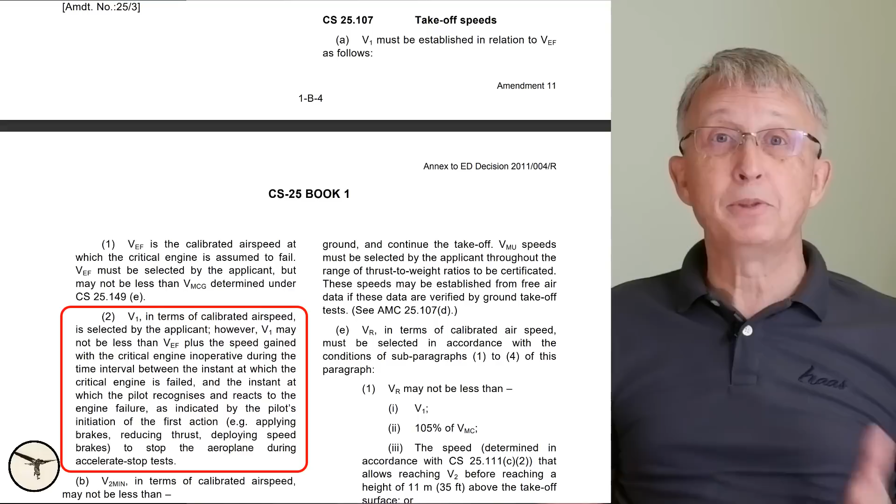This is similar to what you do when you're reaching minima during an instrument approach. If you are not visual before minima, your decision is to go around when you reach minima. I have made a video just about that, and you can see it here. I made a link below.

So when pilot monitoring calls V1 and you have not decided to stop, you are committed to go. If you decide to stop after V1, you may not be able to stop, either because there is not enough runway or because the brake energy limit is exceeded.

It is also very important that pilot monitoring calls V1 at the correct speed. The best practice is to finish the callout when the aircraft is reaching V1.

What are the risks involved in a high-speed abort? I will use data collected in the period from 1959 to 1990. Out of 230 million flights, there were 76,000 rejected takeoffs. 74 of them, or 0.1%, resulted in accidents or incidents.

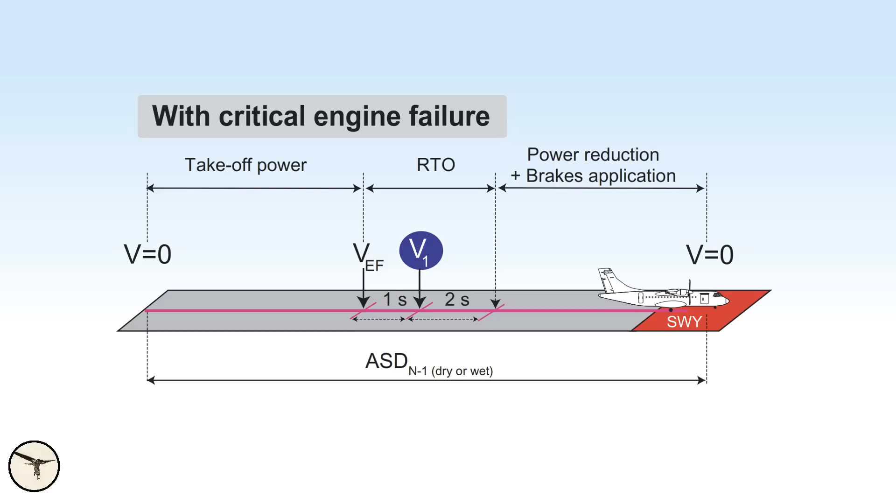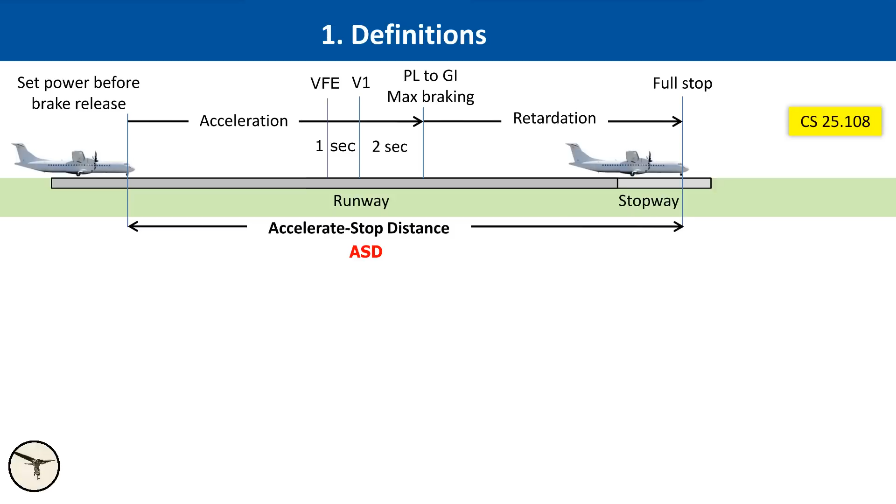The accelerate stop distance is determined as follows. The critical engine is simulated to fail 1 second before V1. At V1, the pilot starts to apply idle thrust and full braking. The brakes are fully worn to simulate a worst-case scenario. Use of reverse is not included in the calculation unless specifically mentioned. As I said earlier, the accelerate stop distance includes a distance equivalent to 2 seconds at V1 speed before deceleration. This gives a little margin.

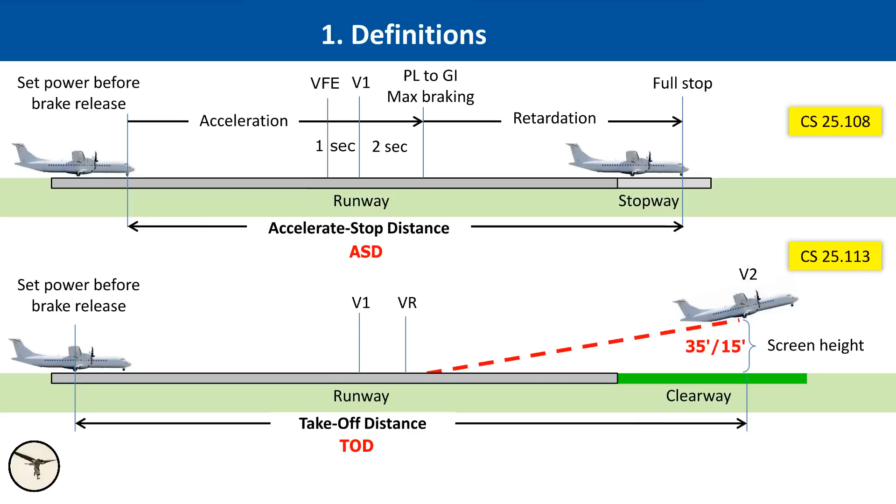The takeoff distance is determined in the following way. The critical engine is simulated to fail at V1. The aircraft continues to accelerate past V1 with reserve takeoff power on the operating engine until reaching VR, rotation speed. When airborne, the aircraft shall pass over the end of the runway with a height of 35 feet, or 15 feet from a wet or contaminated runway, with a speed of V2. After the landing gear is retracted, the aircraft shall climb with a gradient of minimum 2.4% of the travel distance until reaching acceleration altitude.

Then we level off and accelerate to the speed for the best rate of climb, reduce power to MCT, maximum continuous, retract the flaps and continue climbing.

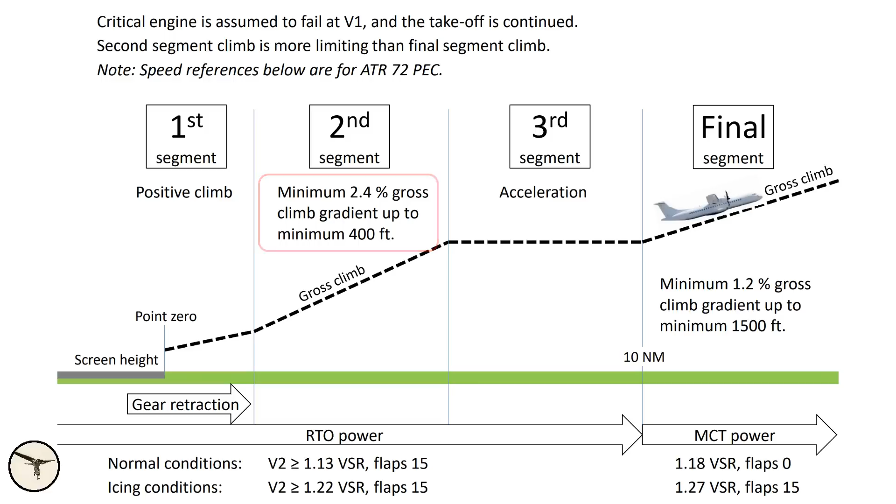Minimum acceleration altitude is 400 feet. Obstacles might require a higher acceleration altitude. The obstacles must be overflown with a height of at least 35 feet, plus a safety gradient of 0.8% of the travel distance.

Before the runway at Cataclan was extended, it had an elevation of 7 feet. The highest obstacle was 138 feet above the airport, or 145 feet above sea level.

We had to cross over the obstacle with a height of 35 feet, so total 180 feet, plus 0.8% of the distance from the runway end to the obstacle.

The distance is 698 meters, or 2,290 feet. 0.8% of 2,290 feet is 18 feet, giving a total of 198 feet. So let's say 200 feet.

When flying commercially, we want to carry as much payload as possible. After all, it is the passengers and the cargo that pay our salaries.

When the runway is long and there are no climb restrictions, we can load up the aircraft and go. Shorter runways require more planning. We do not calculate how much runway we need, but how much payload we can carry from that runway under the current conditions. As I said earlier, minimum V1 is engine failure speed plus 1 second.

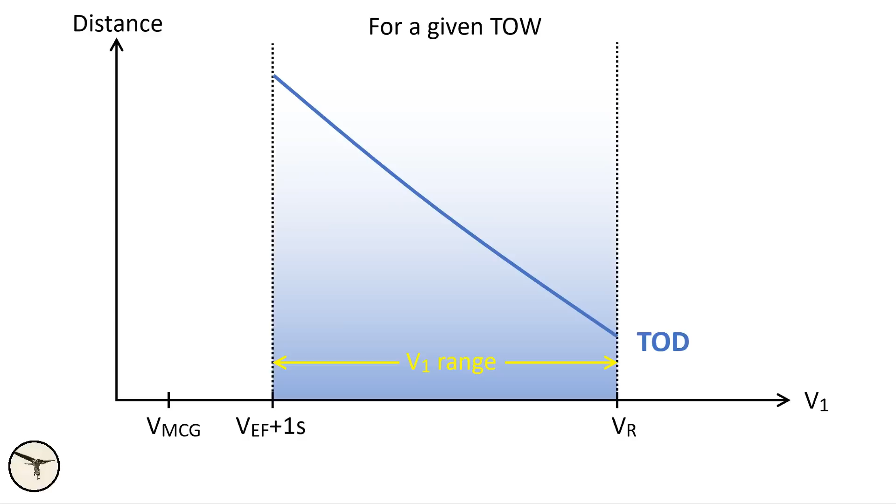The optimum takeoff V1 is one where the accelerate stop distance and the takeoff distance are equal. That gives us what we call a balanced V1. There are more factors to this equation, but I hope you get the point.

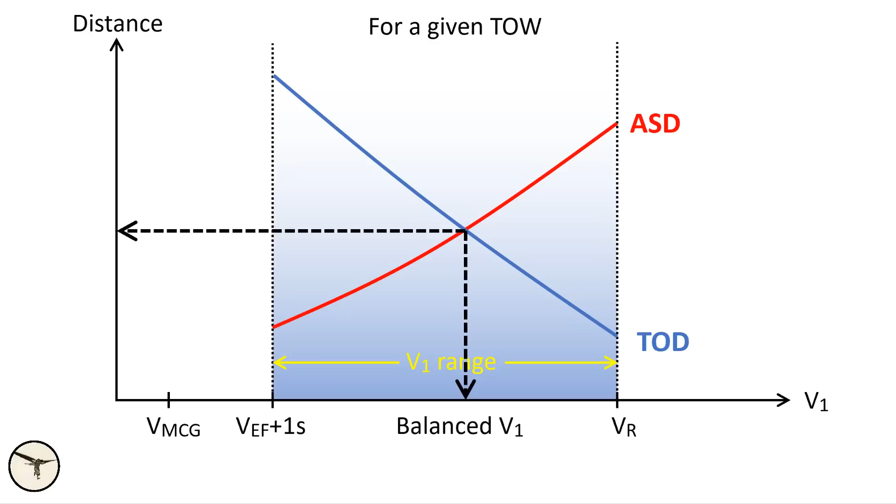The takeoff run available, TORA, or the length of the runway, is 870 meters. The takeoff distance available, TODA, is the same.

The accelerate stop distance available, ASDA, is 950 meters, which means there is an 80 meters long stopway. We have 10 knots headwind, the temperature is 32 degrees, and the QNH is 1003, slightly below standard.

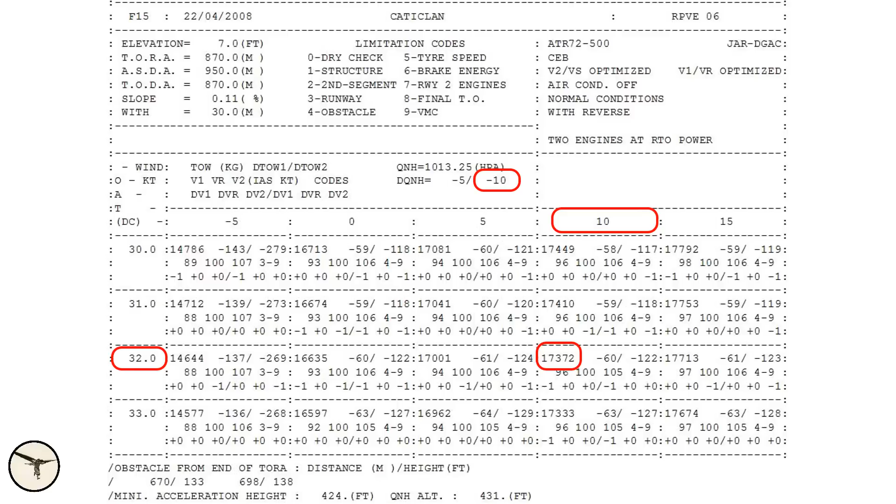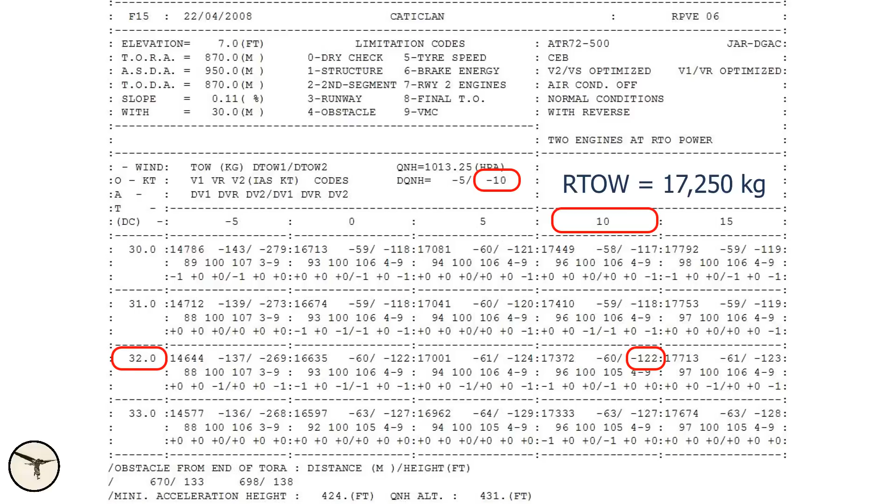Our takeoff weight must not exceed 17,372 kilos, minus 122 for the lower air pressure. So the regulatory takeoff weight is 17,250 kilos. In the simulator, I use 17,200 kilos.

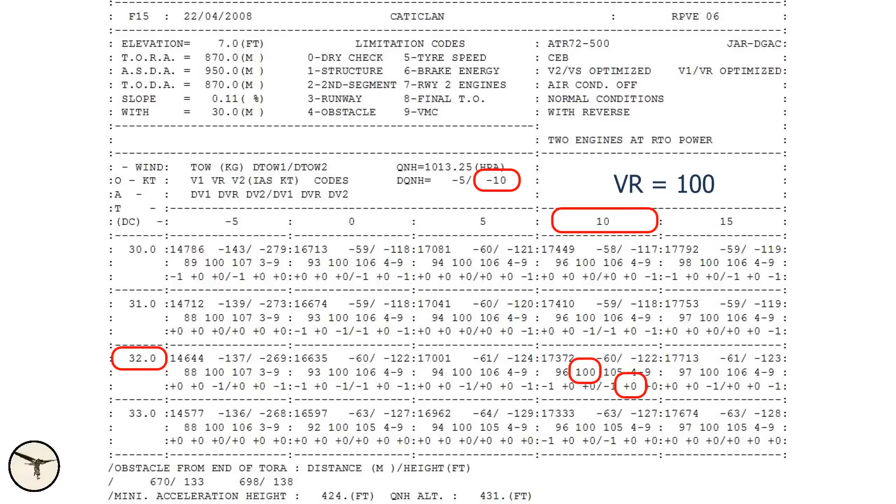V1 is 96 minus 1 knot for the lower air pressure, so 95. Rotation speed is 100, V2 is 105. Those speeds are as low as they can be and still have the required margin to VMC and stall speed.

VMC is the minimum control speed. In the simulator, the engine failed at 93 knots, just before V1.

This barely gives time for the captain to react, but since I had briefed him to abort the takeoff, he did that. It is also worth mentioning that since he was prepared, he was able to react and the aircraft began to brake within 2 seconds after V1. Without my briefing, he would have continued.

Then we had a second takeoff, where the engine failed between V1 and V2. The first officer was pilot flying, and this is how it went.

You're up. Engine failure. Right uptrim, 100% engine. And they crossed over the hill. The altimeter showed slightly more than 200 feet.

Remember, our calculation was 198 feet. So at this airport, continuing the takeoff was equally marginal as stopping. Such takeoffs require preparations and focus and precision.

But how often does an engine fail at V1? This is a very rare event, right? If the engine fails 10 knots before V1 or 10 knots after V1, you suddenly have a much better margin.